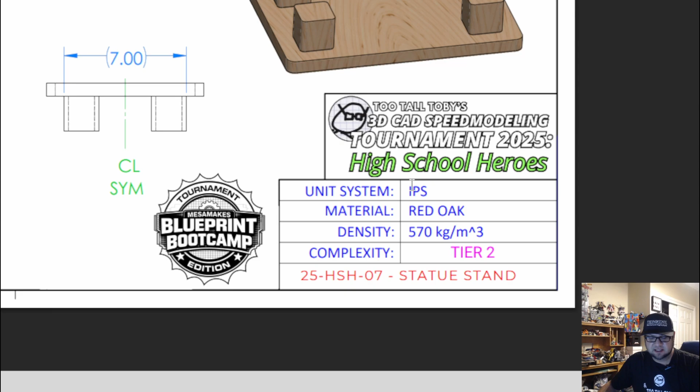So if we jump on over to Onshape, we'll take a look at this print. As you can see here, it is drawing number 7, statue stand. It's a tier 2 model using red oak material in inches, pounds, and seconds. So I don't have to change my units today because I draw pretty much everything in inches.

We'll jump up here. We need to figure out the mass of this part in x.xxx pounds with a tolerance of plus or minus 0.002 pounds. So not much room to play with there. Really tight tolerance, but it's a fairly simple, straightforward drawing.

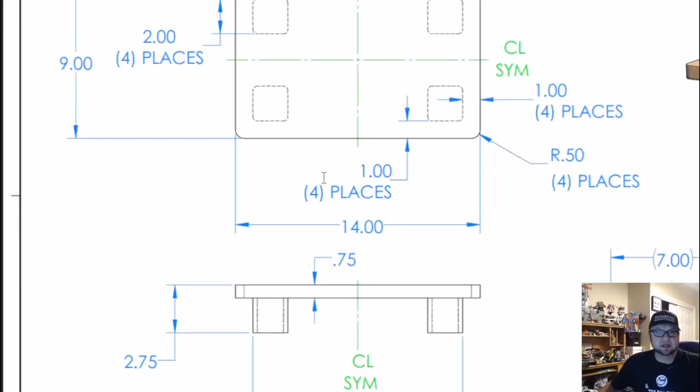So we take a look. Most of our drawing is going to be done here in this kind of shape right here. Let me zoom out a little bit. There we go. We're going to draw a rectangle, and then everything, as you can see, has 2 lines of center line symmetry. So we need to draw a rectangle 9 by 14, round those corners on the outside to a 0.5 inch, half an inch radius in all 4 corners.

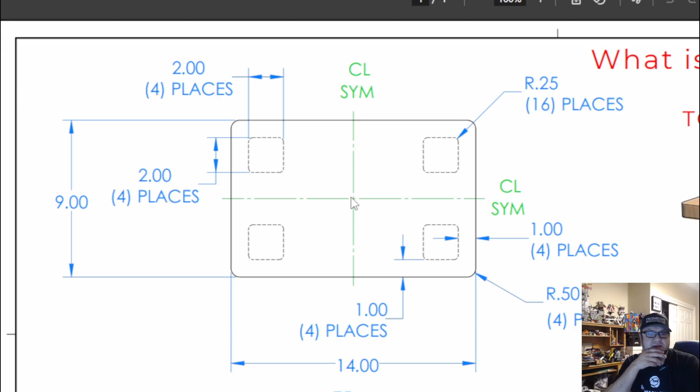Then we will jump in and probably draw one of those legs and then pattern it around. That tabletop is 3/4 of an inch thick, 0.75, and those legs are going to be 2.75 from the bottom to the top. So if we do some simple math, it's going to be 2.

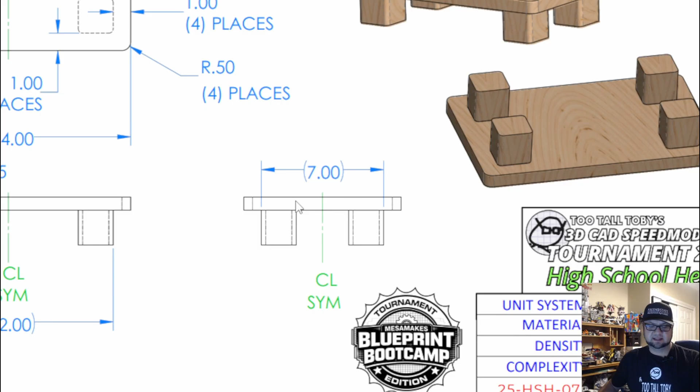So I'm going to start, I think, by drawing that tabletop. Then I'll draw a leg, actually all in the same drawing, and then we'll go from there. So let's jump on over to Onshape, our part studio, and we will get started.

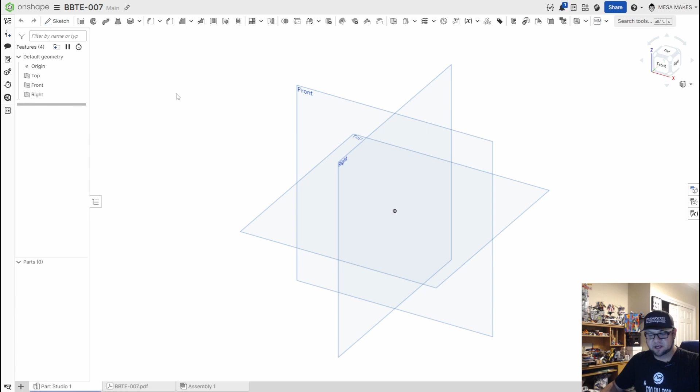All right, once we are in Onshape, first thing, we need to start a sketch. So we'll start on this top plane, Shift and S to start that sketch, N to normalize, and P to hide our planes. I'm going to do a center point rectangle right off of my origin, and that needs to be 14 inches wide by 9 inches tall.

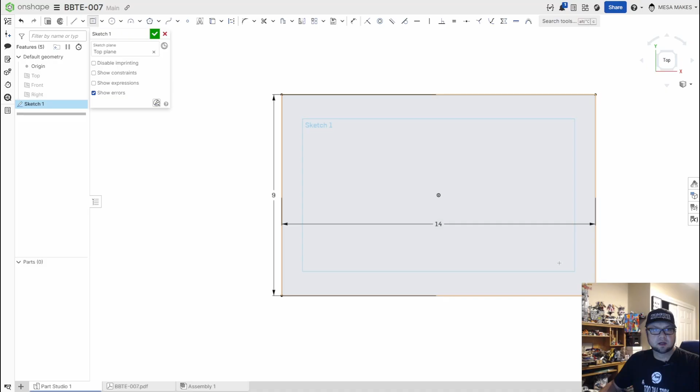Next thing I'm going to do is a rectangle, another center point rectangle over here for my feet, and those need to be 2 by 2, so 2 inches by 2 inches. I'm going to come in here with the dimension tool, click from there. That needs to be 1 inch over, and this needs to be 1 inch off there. So we'll go from there.

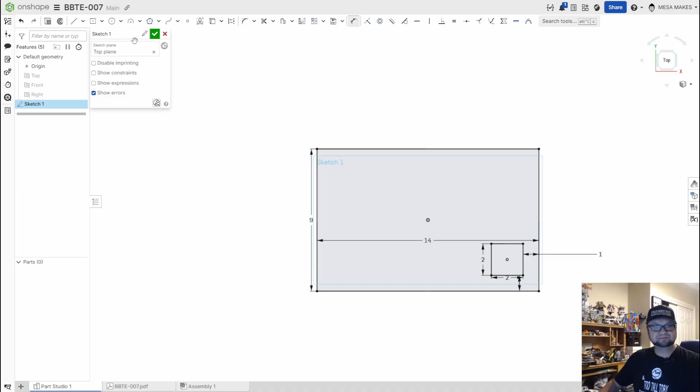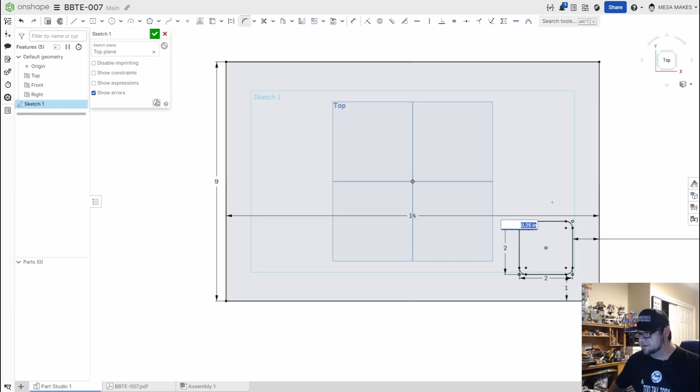And because everything is symmetrical, I can use my mirror tool. I'm going to click that line, and I'm going to mirror. Actually, before I do that, I'm going to round those corners. I'm going to add a fillet on these pieces here, because the more I add now, the less I have to do when I actually mirror them over. So those need to be rounded to 0.25, which is the default.

Now we're going to mirror over that line like so. Shut off our mirror, turn our mirror back on. We'll select that middle line, and I'll mirror both of these over that way. And now we're perfectly spaced.

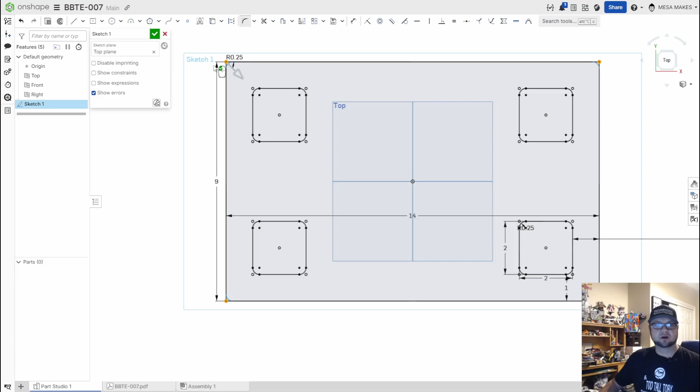And I know Toby is probably going to be mad at me for doing this. I like doing my fillets in the sketches instead of the end of the drawing. So I'm going to double click, do a 0.5 here, and we'll accept.

Now if we look over, I need to do an extrusion of everything, but I want to go up with it 0.75 for my tabletop. We'll accept that.

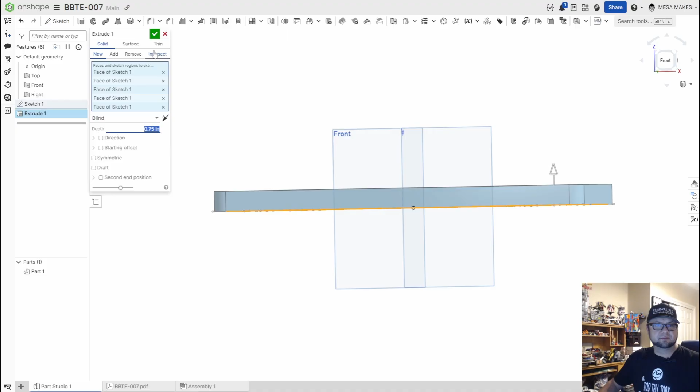And then if I flip around to the bottom side, I can turn my sketch back on and pick just my legs. And we know we did the math earlier. Shift and E, 2. And let's say you didn't know the math. We could type that in and say 2.75 minus the thickness of 0.75. And that would give us our math.

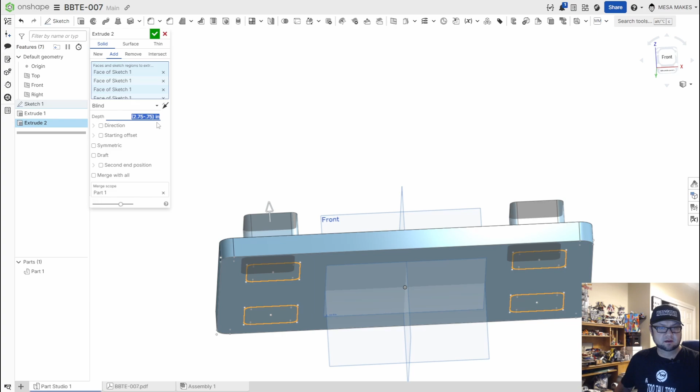Now the problem is, as we're going through the top, we want to go down that way. So if we accept it and I were to measure, I could click from this face up to this face, and I get a total distance. You guys can't see that, my face is in the way, of 2.75, but that's going to work there.

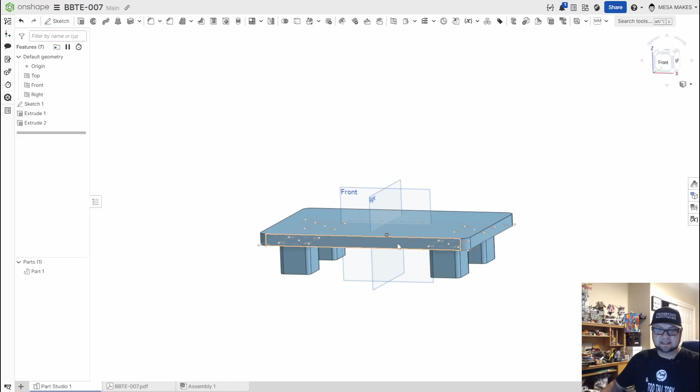Next thing is to add our material, so assign material, because this is my done shape, and we're going to wait for my internet. Man, I need to upgrade.

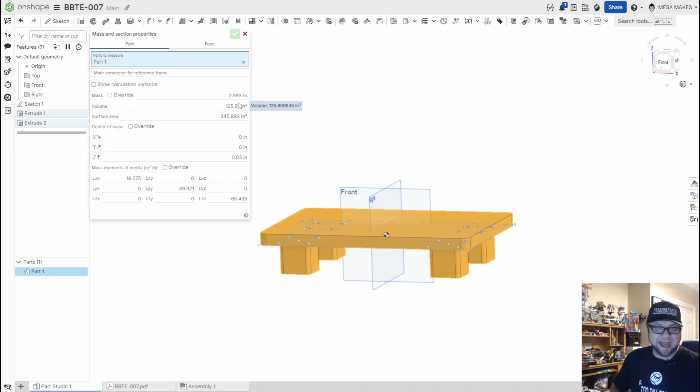There we go. Library, we're going to pick our custom materials. We're going to do the red oak, say okay, pick my weight, and I have a dimensioned mass of 2.593 pounds, which is exactly what we need. With our tolerance of plus or minus 0.002, I could go as low as 2.591 or as high as 2.595. So very, very cool little part. We are within tolerance.

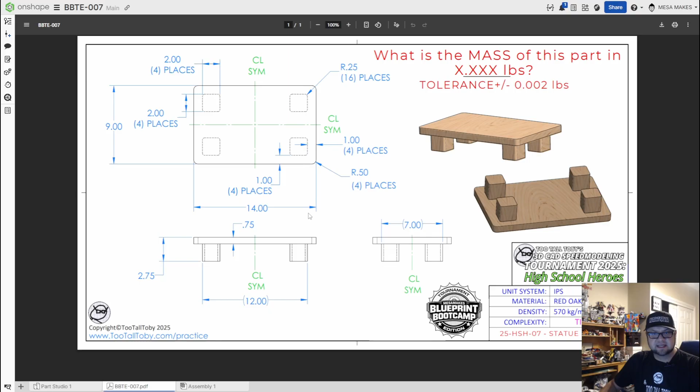But a couple of things I wanted to show you is that sometimes in these drawings, and Toby's really good about doing this, he gives you a lot of information that's necessary, but you can get from other things. So if we take a look at this drawing, I told you guys we need to make sure these are outside to outside 12 inches, and the short side needs to be 7 inches. But if you just do an offset of 1 and 1 on these, and then pattern them, that takes care of all your measurements.

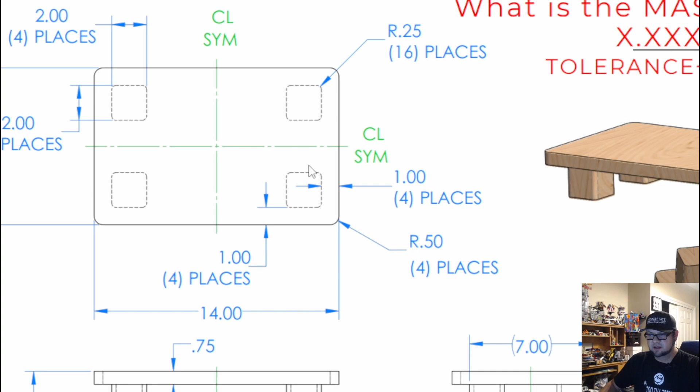So it'll help out tremendously. Same thing here, a radius of 0.25 in 16 places. Why draw it 16 times when you can do it once and copy it 4 times over? So very, very cool little part. You could have drawn a quarter of it and mirrored that, then mirrored the whole thing twice. Some people like drawing just half of it and mirroring that over. But whatever's going to work for you, it's a pretty cool little project.

It's a little big to 3D print, but you could scale it down and make it look like a wood statue stand, or even just make it out of plastic if you want to store some action figures or maybe some awards or whatever. You do what you want with it. But it's a cool little project, again, from our high school heroes tournament we did last January. I guess 2 Januaries ago now that we're in February.

But easy enough to kind of learn how to do some of these harder challenges. You got to start basic. So start here, build up your skills, do it again and again, repetition, make yourself faster. Treat these, me and Toby have talked about this a bunch, like a workout, right? You don't go to the gym one day and get buff overnight. It takes time, dedication, and you got to keep going at it and getting better.